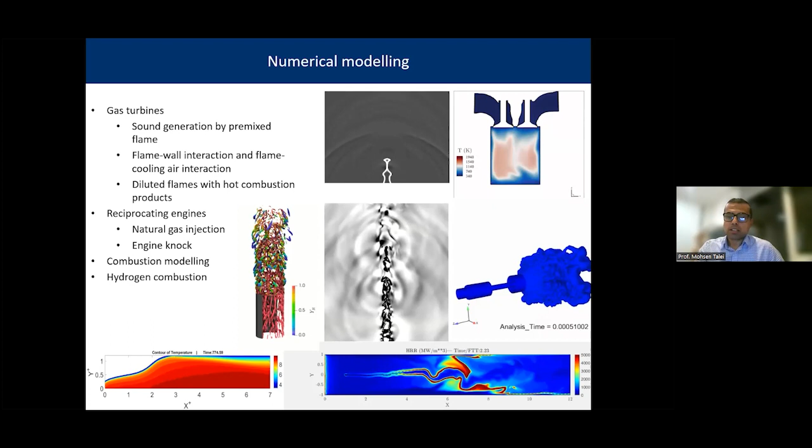So generally, combustion modeling is needed for any type of simulation of a gas turbine or engine, large eddy simulation or RANS. And one approach we have used here is gene expression programming. We've done some work to develop improved combustion models. And obviously alternative fuels, including hydrogen, is another topic that we are looking at to understand how combustion properties of hydrogen can impact the flames and also the performance of the end users. So that was a summary of the work that we do.

I'm going to talk about the motivation now for the studies that I'm going to present today. So the two key issues which are related to gas turbines and stop us from making them more efficient and cleaner. One of these issues is called combustion instability, which is a problem in low NOx emission gas turbines when we want to use lean premixed flames.

That problem starts because flames generate sound, and that sound can interact with the boundary conditions and then reflect back to the flame, and the interaction of the sound waves with the flame can make it unstable. If this instability is not controlled, it can result in combustor failure, and obviously it makes a very loud noise. So this is one issue that doesn't allow us to have cleaner gas turbines, and it can become a problem for hydrogen, as I will explain later. Another issue is CO emissions.

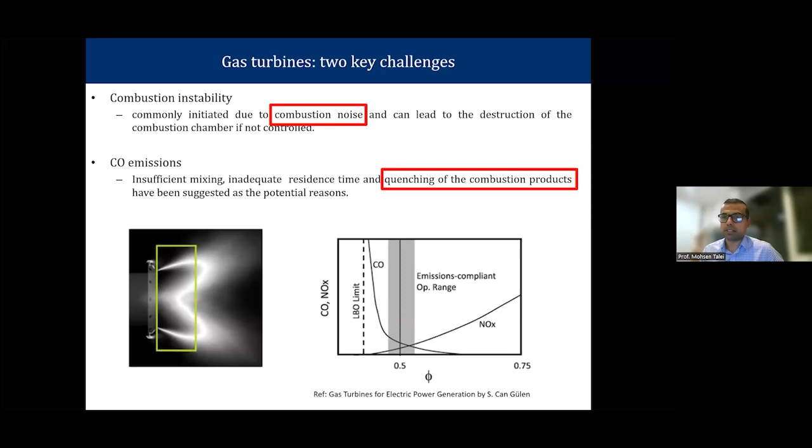So two examples that I will discuss today include sound generation by premixed flames and CO emission due to flame–cooling air interaction. So in a gas turbine, you also use cooling air to make sure that the wall does not overheat. And we want to look at how CO emissions will be affected by cooling air. So the purpose of this talk is to focus on laminar premixed flames, but also I'm going to show you how the insights from those laminar flames can be used to understand what might happen in turbulent flames.

So we can do direct numerical simulation to study these phenomena in detail. It allows us to resolve all the length and time scales of the problem. And through these studies, we can also look at the implications of the findings for modeling, okay? So that's basically what I'm going to talk about today. So let's talk about the first example. How do premixed flames, especially the laminar ones which you perturb, generate sound?

So this is a picture, I would say a work of art, by a former PhD student that we have, Dr. Samuel Wiseman. He's currently a research fellow at NTNU. And what he did was basically use a laminar premixed flame, and he had the opportunity to perturb it with a speaker underneath. So the speaker allows you to excite the flame for a range of frequencies and amplitudes. And one of the things he did was to have a bit of fun with this flame. So you can see you get all sorts of shapes depending on how you excite this flame, and also depending on how you apply the boundary condition.

For example, you can have a glass around it to confine it, or you can have an open flame without the glass. Okay, so one of the reasons I put this slide is that the possibilities are endless when you have a laminar flame. The starting point is laminar, but as you increase perturbation, you can actually get something which is close to a turbulent flame.

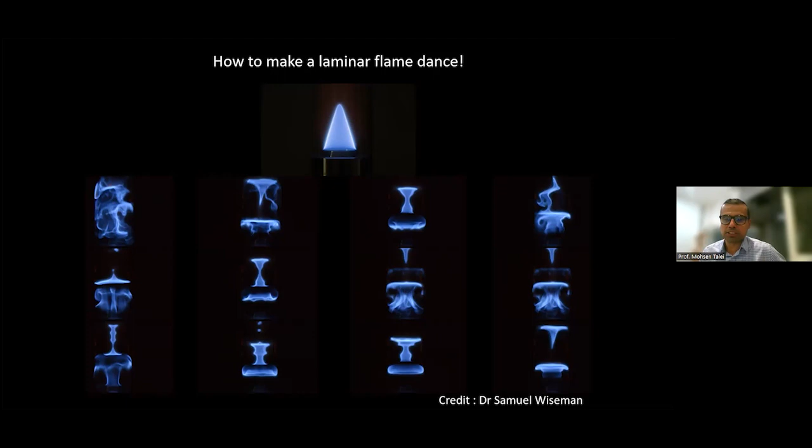All right, so I'm going to talk about the DNS study, and this is an attempt to simulate a laminar flame which is excited at the inflow. For this DNS study, we wanted to make sure that the computational domain is sufficiently large to allow the acoustic waves generated by the flame to leave the domain without creating any issues. So let me just use my pointer to explain what we have in this problem. Because it's a laminar flame, it's a 2D problem, we use a symmetry line in the middle just to simulate half of the flame.

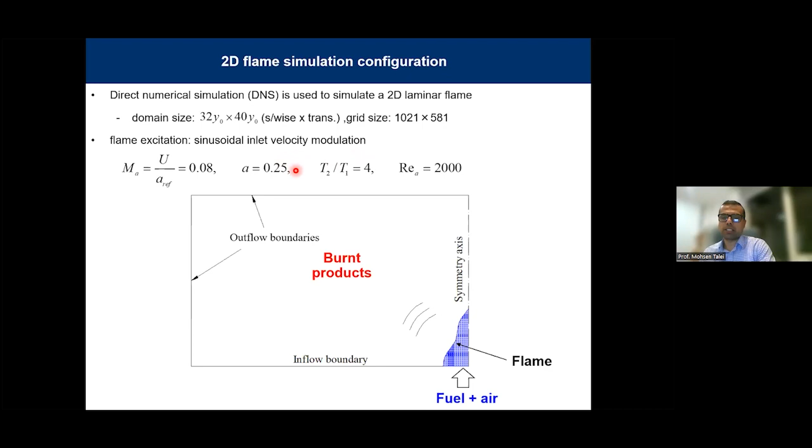We introduce fuel and air from the bottom, and then we use velocity perturbation with an amplitude of 25% to force the flame and see how the flame responds to the perturbations, and also how sound is being generated depending on the frequency of excitation. The conditions that we have chosen are not completely relevant to gas turbines, but we try to make some parameters more relevant to the conditions that we have in a real flame. So this is an animation of how the flame responds to velocity perturbations at the inlet depending on the frequency.

So for all of these cases, the amplitude is the same. What we do, we change the frequency of excitation. So the animation that we have on the left-hand side is when you have the highest frequency. As a result of that, the flame doesn't respond because the time scale of the excitation is very short. But as you have a time scale of the excitation comparable to the flame time, you start to see wrinkling on the flame surface.

As you go to lower frequencies, that wrinkling is going to create even more disturbance to the flame, and it's going to be longer in terms of wavelengths. So one phenomenon that you can see for intermediate frequency is what we call a flame pinch-off. So you have a pocket of unburned gas getting detached from the flame, and it's going to be consumed further downstream.

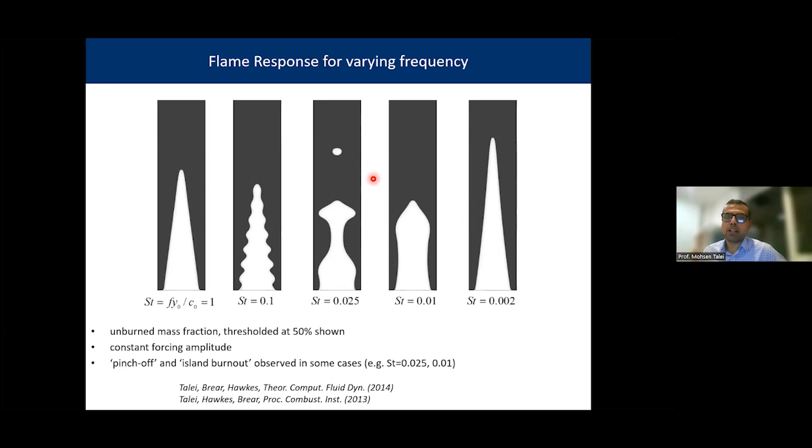When you have very low frequency, which is the animation on the right-hand side, then the flame just expands and retracts in a quasi-steady manner. You don't see these flame pinch-off and what we call island burnout events anymore. Okay, so they just happen for a limited range of frequencies. So this is exciting because when we look at the acoustic field for the intermediate frequency case, we can see how these phenomena will contribute to the generated sound in the far field.

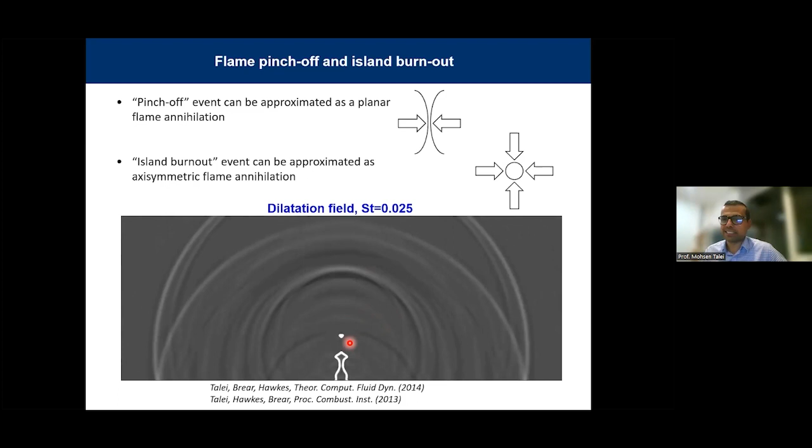Okay, so this is insightful, but the question is, these are laminar flames. Do we have these events happening in a turbulent flame? So now that we have this insight, is it really useful? So the next step for us was to look at a turbulent premixed flame. We've done some analysis on the laminar flame, looked at some other configurations as well, and developed some theory. But one of the things that we are very interested in is to see whether the same thing happens in a turbulent premixed flame. So again, we use direct numerical simulation.

And in this case, we have done simulations of two equivalence ratios, 1 and 0.7. We have chosen the parameters such that the Reynolds number is the same between the two cases. And the mixture is basically methane-air, okay? In order to make sure that we have the right boundary condition, we used another DNS study to impose the right profiles at the inflow.

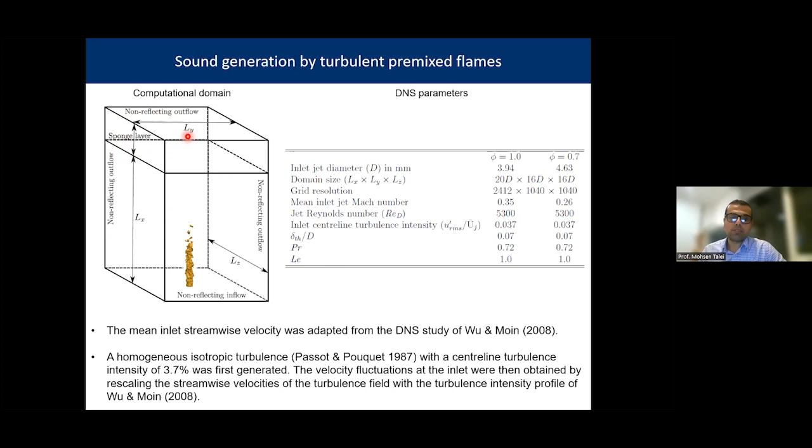The challenge we had for a turbulent premixed flame was to make sure that we don't get any reflection from the outflow. So it was even harder than a laminar flame. And what we had to do was, on top of having non-reflecting outflow boundary conditions, we also had to use what we call a sponge layer to make sure the acoustic waves are damped before they create any issues inside the domain, okay? And obviously, when you do a DNS of a turbulent premixed flame, it's going to be very costly. So we were limited to doing only 2 cases here.

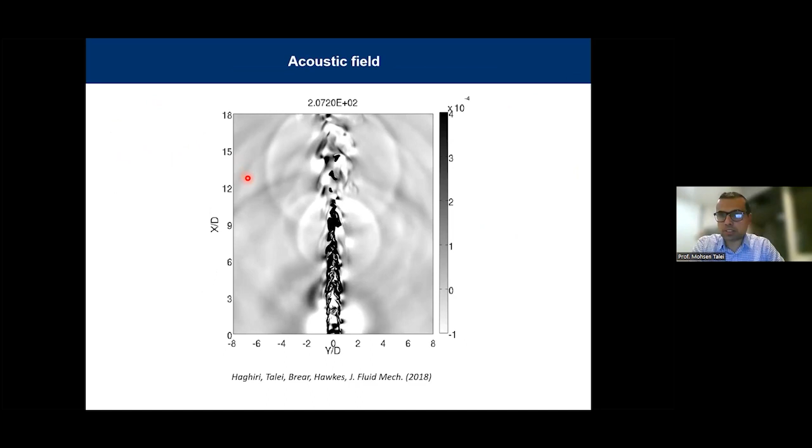So now let's look at the dilatation field. And I'm just showing you the stoichiometric case, all right? So it's a turbulent flame. It's hard to see what's happening in terms of the flame itself, but you can actually see the signature of these monopolar sound sources across the flame. So not just happening at the tip, but you can see from the beginning, there are some monopolar sources of sound in this premixed flame. And you can see how they interact with each other and how they propagate to the far field.

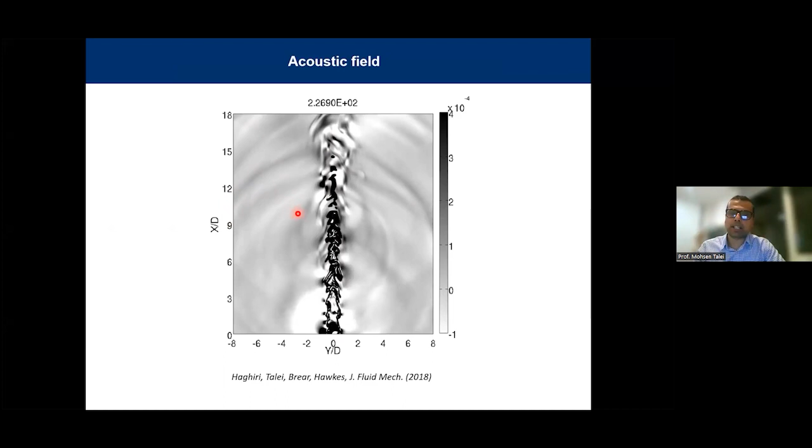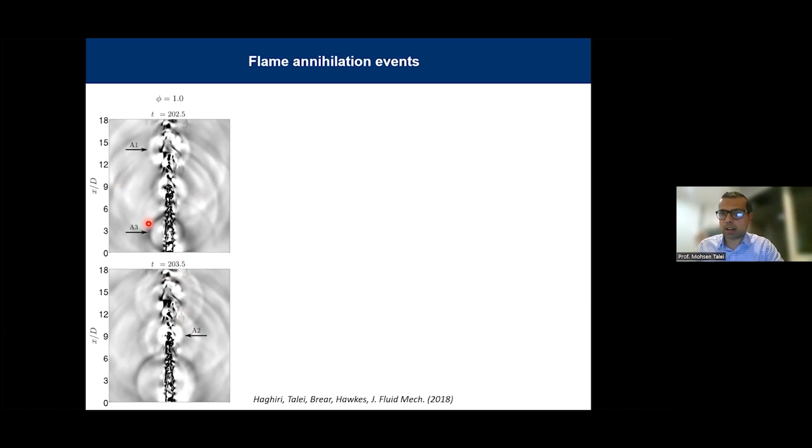So in terms of visualization, we can actually pick a few of these spherical waves and trace them back to see what is actually causing the sound. What we've done is just select the 3 spherical waves here. So I call them A1, A2, and A3. And we look at where these waves are coming from, okay? So if I look at A1, that's basically a pocket burnout close to the flame tip. So it's very similar to the island burnout event that we had for the laminar case. So they are quite frequent, and this is a significant sound source.

What is interesting is that if you look at some of the past experimental studies, they report that the flame tip is a very strong sound source, but in the experiment, they were not able to actually demonstrate what is causing that sound from the flame tip. And we reckon that this is basically the main mechanism contributing to the generated sound close to the flame tip.

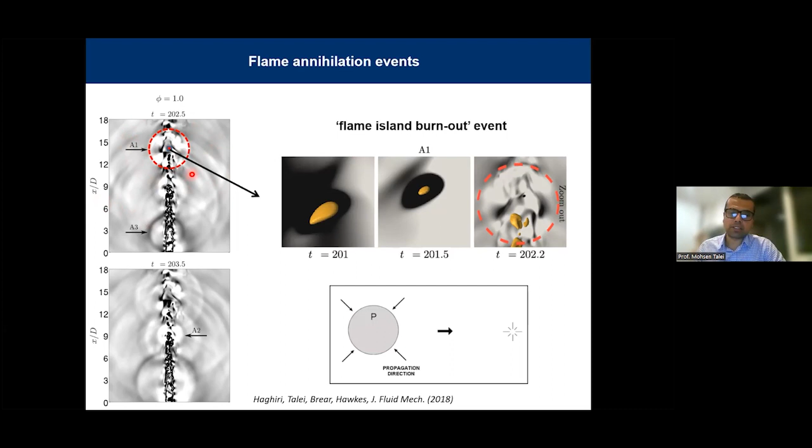And the third type of phenomenon that we identified from visualization is what we call the tunnel formation. So when you have 2 flame surfaces touching each other, and that creates a hole in the middle of the flame, that's basically a tunnel formation event, and that is also a source of sound. So we didn't have this kind of event in a laminar flame, but you can imagine this is like a 1D laminar flame annihilation, but obviously it's not completely 1D. You have also a bit of curvature involved around this event.

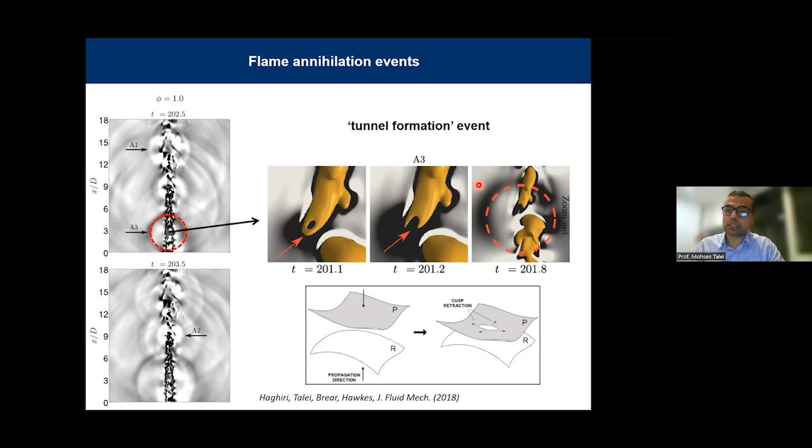Okay, so this is all good. We've done some visualization and it looks like we've got lots of these events contributing to the generated sound. But then the key question is, how important are they in terms of the overall generated sound? Are they really contributing to the total generated sound, or are they just random events creating a bit of noise? So in order to quantify their significance, we had to use an algorithm to identify them automatically.

And we did that based on the gradient of the progress variable field. So if you consider two flame surfaces touching each other, at the points that they touch each other, the gradient of C is going to be 0. And this is what we call a critical point. So based on some threshold on the progress variable field and also the gradient of C values, we were able to identify these events. We developed an algorithm that we could track them in time.

And we also tried to isolate them from the rest of the flame surface to look at how much sound they generate. And obviously this is going to be quite challenging because it's really hard to draw a line around the annihilation event and say, okay, this is the boundary. We had to actually do a bit of sensitivity study to understand whether that is achievable. So based on that study, you have to form a Hessian matrix, and based on the sign of the eigenvalues of that matrix, you can identify the different events automatically.

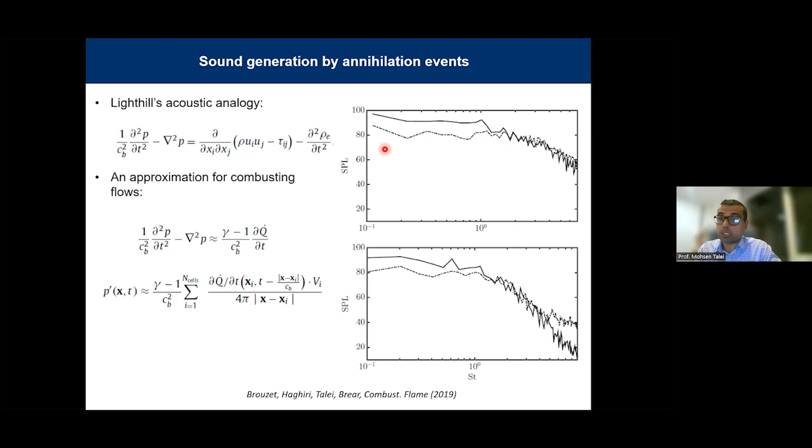Okay, so that was again an interesting observation. So we were able to see how these flame interaction events create noise, and also how important they are in a turbulent flame. And now I'm going to move on to the modeling side of it. So in a real device, we cannot use DNS.

We are interested in other simulation tools, such as large eddy simulation and RANS. So we picked a combustion model, which is based on the flame geometry, and is quite popular. It's called flame surface density modeling. And the idea is that if you have the progress variable equation, which I'm showing you here, and you filter it, the right-hand side of the progress variable, you can actually replace it by a model.

So instead of trying to estimate the filtered reaction rate, you can just get rid of the whole right-hand side. So you can combine reaction and diffusion term into one term, and then try to model that. Okay. So in your LES or RANS, then you can just solve this equation with a model for what we call the flame surface density. The common model that is used is the following.

So you've got the filtered flame front displacement term described as a function of sigma gen, which is basically based on the wrinkling factor, you can estimate it. And then a factor here, which is usually assumed to be equal to rho u SL. So it's a surface average displacement speed, okay?

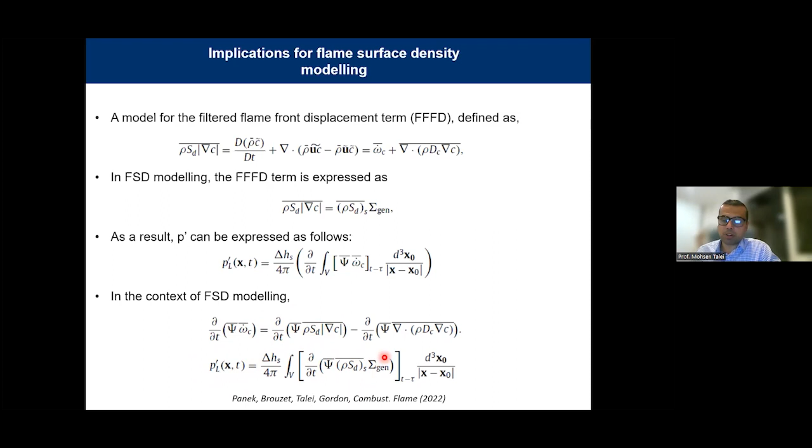So you can immediately see that if previously I had a problem of modeling this term properly, and I was struggling to get the right answer, now I have to get the time derivative of that term right. Okay, so it can be quite challenging to do that. So I can then calculate the pressure fluctuations both from the DNS term as well as the estimated one from the model.

Okay, so let's look at some results of the model itself, the model that we use for flame surface density. We picked 3 different models that are cited in the literature as reasonably good models, like they perform reasonably well. I'm not saying that other models do not perform well, but some recent studies have shown that these models are actually good candidates.

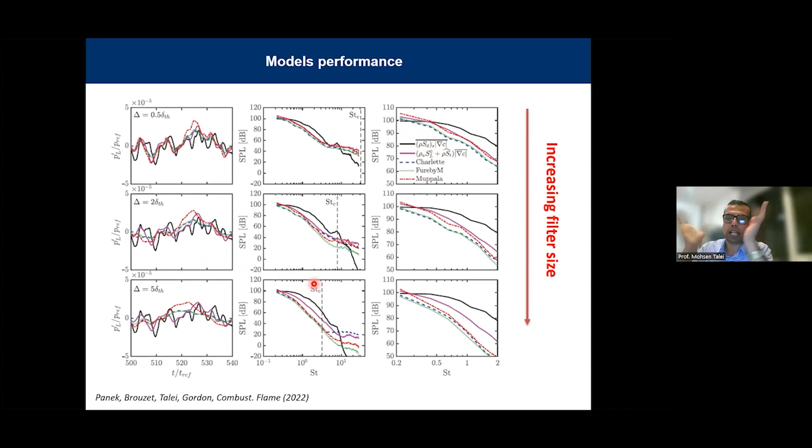So what does it mean? It means that all the effort we put into developing better models for the wrinkling factor is actually good, but we also need to dedicate some time to model the surface average displacement speed, because when you have a turbulent flame, obviously that surface average displacement speed can vary. It's not going to be just equal to SL, all right? So that was one of the conclusions that we drew from that study, that we should spend some time to think about the modeling framework and perhaps get the balance right in terms of where we should put the effort in.

Okay, so the next step. As you can see, we are trying to increase the complexity of the problem. We started from laminar flames, and now we move on to a real burner. So this is a rig which was developed by NTNU. They've done some experimental work on that. It's basically a rig that can operate at elevated pressures, so we can go up to 2 bar. And they also tested hydrogen natural gas mixture. So we, in collaboration with Siemens Energy, had a project to simulate that burner and try to understand whether we can capture azimuthal combustion instability in this burner, okay?

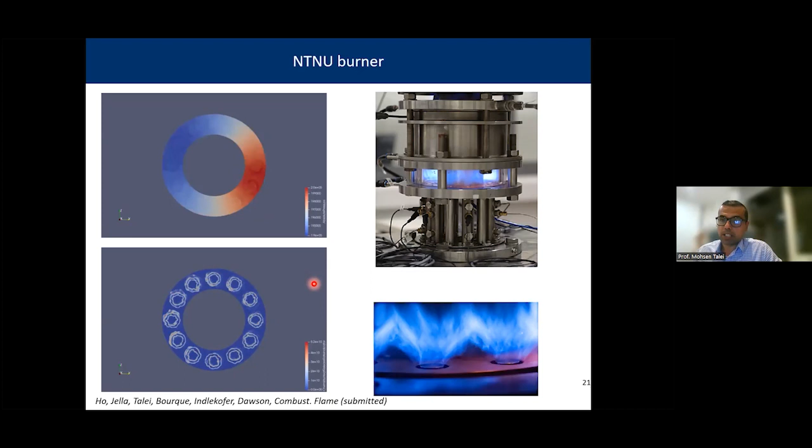So what you can see is that for a range of frequencies up to about 6,000 hertz, the amplitude is not perfect, but the frequencies of peak emissions can be captured from the simulations. But obviously, as you go to higher frequencies, more than 6,000 hertz, you get a large deviation from the experiment. And one of the reasons for that is the dissipation of the numerical scheme.

What is interesting for us is that 6,000 hertz, if you look at the Strouhal number, which is not easy to define in this case, because this burner is not just a round jet flame. You have a bunch of V flames sitting next to each other. But roughly speaking, that 6,000 hertz is equivalent to a Strouhal number of 1. So that's consistent with what we saw from DNS. Okay, so it looks like we have a problem in terms of capturing that part of the sound pressure level when it comes to large eddy simulations.

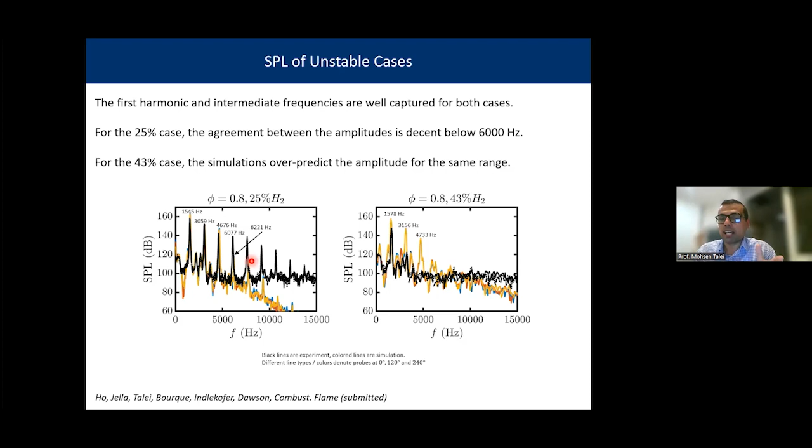Again, we have a problem above 6,000 hertz. So what we concluded is that when you have an unstable case with large pressure fluctuations, the simulations are able to capture those large pressure fluctuations, and they kind of dominate the dissipation errors that you might get. But when you have stable cases, the fluctuations are relatively low, and therefore there might be a competition between the physical sound wave and the numerical sound wave.

Okay. Now I'm going to move on to the next topic, and I understand that I've been talking for about 45 minutes, so I'm going to wrap it up quickly.

So this is CO emission due to flame cooling air interaction. Again, we started from a very simple 2D problem. In this case, you have an inlet on the left-hand side, so a mixture is coming in. We have a flame which is anchored at the inlet, and we have one hole which is injecting a cooling jet into the flame. The purpose of the cooling jet is to protect the wall, but in this case, we just wanted to see how flame cooling air interaction is going to impact the flame dynamics as well as CO emissions. In this setup, we were able to look at the impact of several parameters.

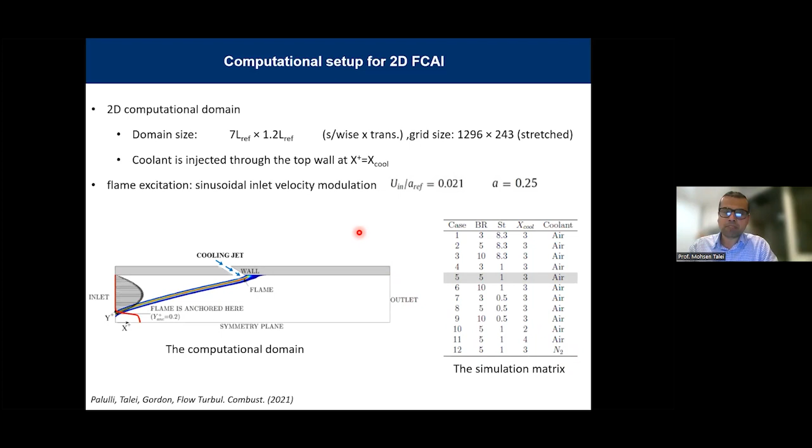So blowing ratio, basically how hard do we blow into this flame? Strouhal number, how much we excite this flame, what range of frequencies do we use? We were also able to change the location of the cooling hole to see what impact it has. And finally, we compared air and nitrogen to see if they have any impact on CO emissions.

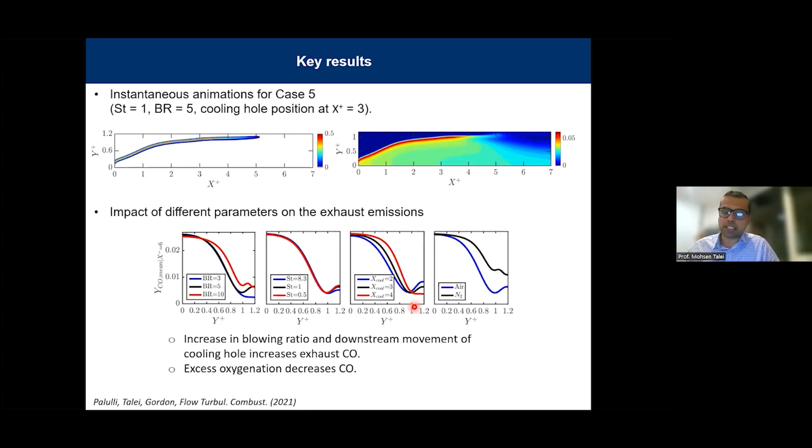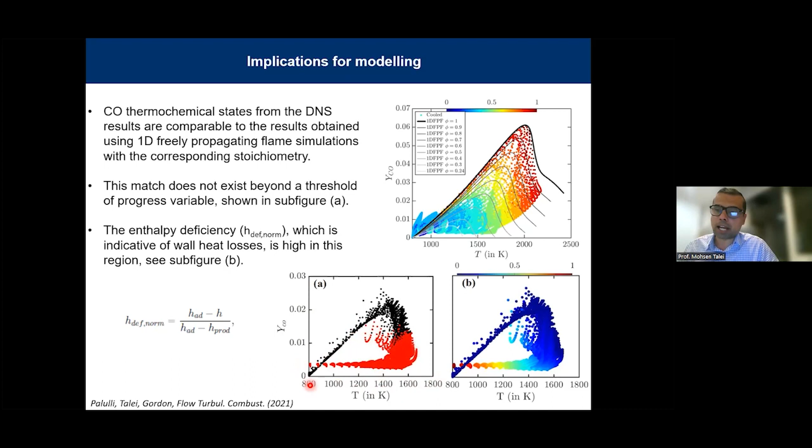When you go to very lean conditions, when the dilution level is quite high, the picture gets a bit more complicated. You have this horizontal branch too, which we realized is related to quenching of the combustion products downstream of the interaction point. That's where the heat loss becomes quite important, and that's going to impact your CO thermochemistry.

All right, so again, the question is, does this happen in a turbulent flame as well? The study we did was to combine two problems into one DNS setup. We had a channel flow, with two flame branches interacting with the turbulence coming from the inlet.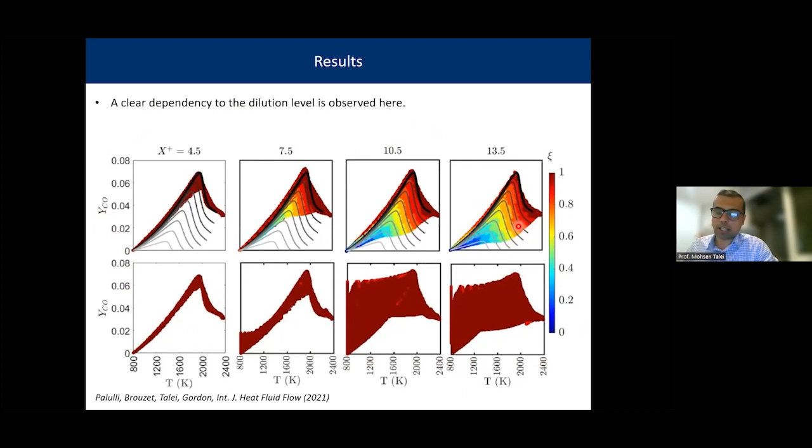When I look at the top wall, which has the interaction of cooling air with the flame, okay? If I look at the bottom wall, which is flame wall interaction, there is no way I can explain it with the flamelets, okay? So I have a problem on the bottom wall, but on the top wall, it looks like the cooling air actually makes the flame behave more like a laminar flame, okay? So what does it mean in terms of modeling?

So if I generate flamelets based on temperature and equivalence ratio and apply them to my DNS to estimate YCO, what I get is a comparison between my DNS YCO and my estimated YCO. The graph on the left-hand side is showing you that comparison at a location close to the outlet. And if I look at the time average, I can see a really good agreement. So for this study, the assumption of having flamelets describing flame cooling air interaction is actually a really good assumption. It's even better than what we had for a laminar flame.

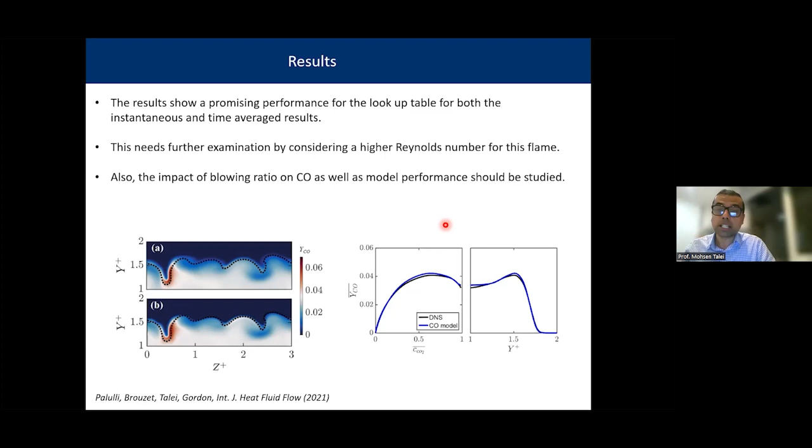However, that's not the end of the story. Obviously, you need to go to high Reynolds number to make sure that this assumption is still valid. But the results that we get so far are quite encouraging. So even if the assumption doesn't work as well, it seems that the flamelet assumption is a better assumption when you have a flame interacting with cooling air rather than just with a relatively cold wall.

So this is my summary slide, and hopefully by the end of this presentation, I was able to convince you that perturbed laminar premixed flames are quite useful. We can use them to study flame characteristics in a systematic manner. Having a range of frequencies allows you to look at how the flame responds depending on the time scale of the flow. That can be quite useful to see how different events can happen and how they contribute to the flame behavior. And you can think about how to design the turbulent flame to study those phenomena and see if they also happen in a turbulent flame.

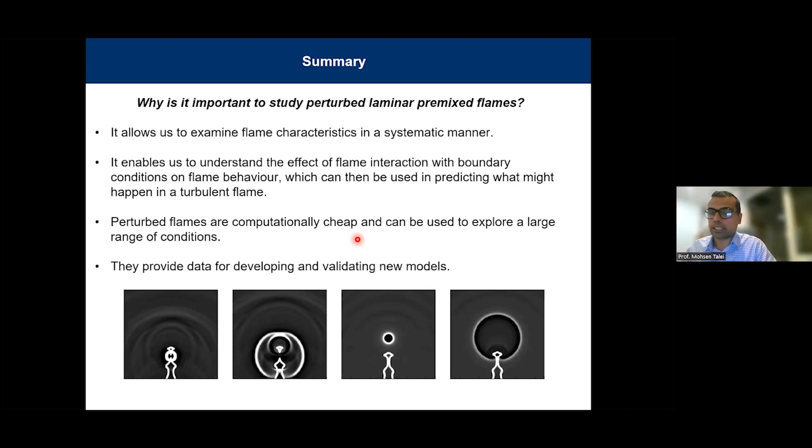Another advantage of laminar flames is that they are computationally quite cheap, and that helps us explore a large range of parameters in these cases. And I think we can start to think about developing and validating new models based on these flames, as well as trying these models for a turbulent flame.